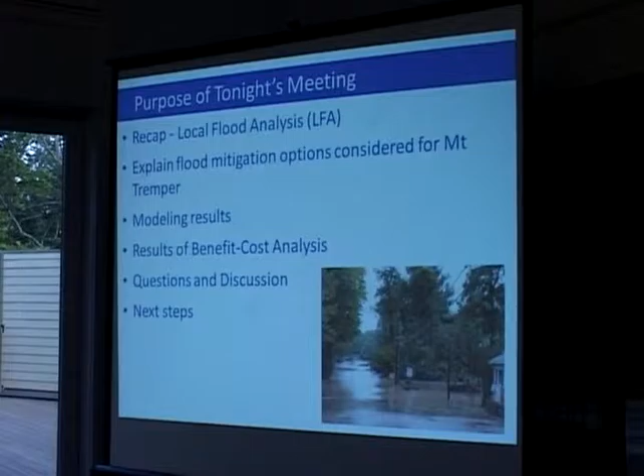So I'm going to go back over just a little bit what's involved in an LFA, or a local flood analysis. What's that all about? We explained it in detail in the fall, but I'll do a recap. Then I'll explain some of the flood mitigation alternatives that we proposed, vetted, and modeled here in Mount Tremper to look at different flood reduction scenarios. I'll show you some of our modeling results and talk about the benefit cost analysis.

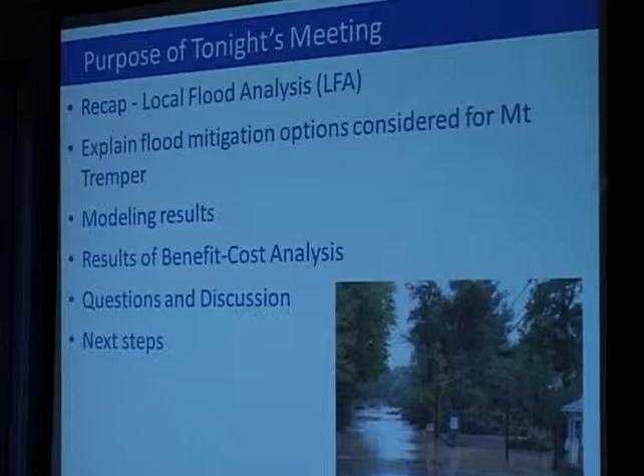And the benefit cost analysis, as Eric said, is really to find out - we can recommend lots of things that may not be cost effective. They may cost more to implement than they would save in flood reduction. So that's the purpose of the benefit cost analysis, and I'll go through some of the results. It's really to find out what's feasible. Then we can have questions and answers and discussion, and talk about what the next steps are.

So just to go back over the meetings, we started off, it was actually September, a year ago. We met with the town board, made a presentation, and talked about an introduction to this process. Then we met in the two communities where these studies are taking place, local flood analysis in Phoenicia, which we presented...

...last Monday, and then we met here. We went away, did our analysis, and met at least half a dozen times with the Safari group, which I'll talk about in a bit. And now here we are. We met last Monday night in Phoenicia and presented our results there. Had a lot of good discussion, and now here we are tonight. Our next step will be to present the final project results to the town board.

So what is a local flood analysis? It's an engineering analysis, scientifically based. We use state-of-the-art hydraulic modeling, developed by the Army Corps of Engineers, to look at different flood mitigation scenarios to find out whether they work or not - do they reduce the amount of flooding, and by how much?

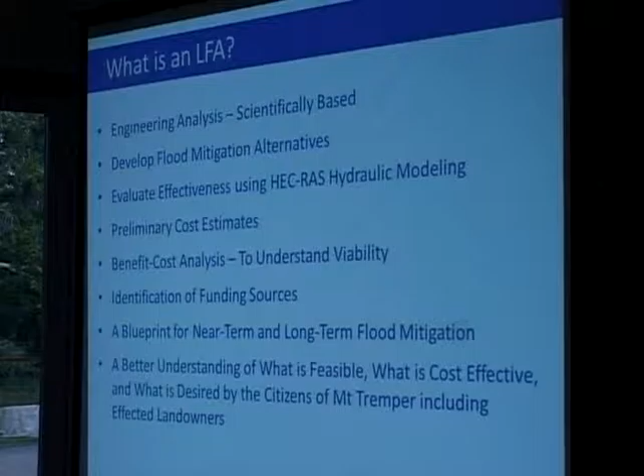Ultimately, what we want to leave you with is a report and a presentation that gives everyone a better understanding of what's feasible in terms of flood mitigation, what's cost effective, and what's desired by the people who live here, including the affected landowners from past floods.

Myself and my colleagues at Milone and MacBroom, probably a dozen of us who worked on this project, worked closely with the Safari Group. Safari is the Shandaken Area Flood Assessment and Remediation Initiative. They worked on other projects prior to the LFA, and we worked closely with them on the LFA. It consists of the town, several Shandaken residents and business owners, and I know some of them were at the meeting last week, and I see some faces here from Safari tonight.

The Ashokan Watershed Stream Management Program, which consists of Ulster County Soil and Water, the DEP, and Cornell, and then Ulster County Department of Environment, and our firm as well.

So the project area in Mount Tremper, it's project area number 2 here because, as I said, we're also doing a similar effort in Phoenicia. It really extends along this reach of Esopus Creek, where we're sitting right over here, and also a reach of the Beaver Kill from where that line is downstream.

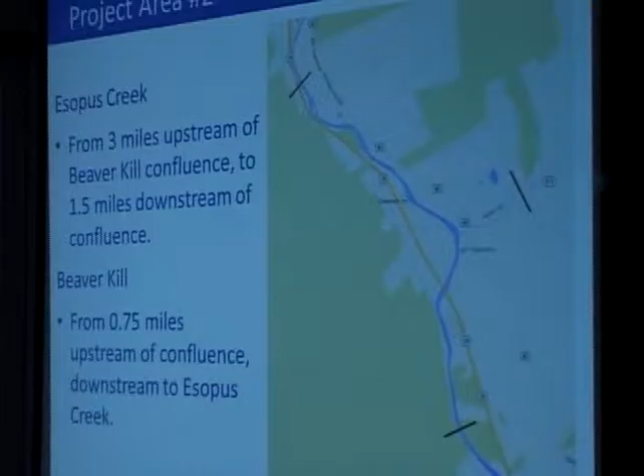And this is the project boundary as it was drawn at the beginning of the project.

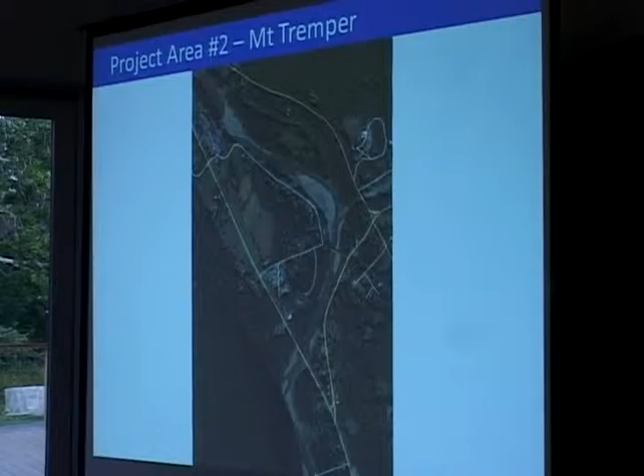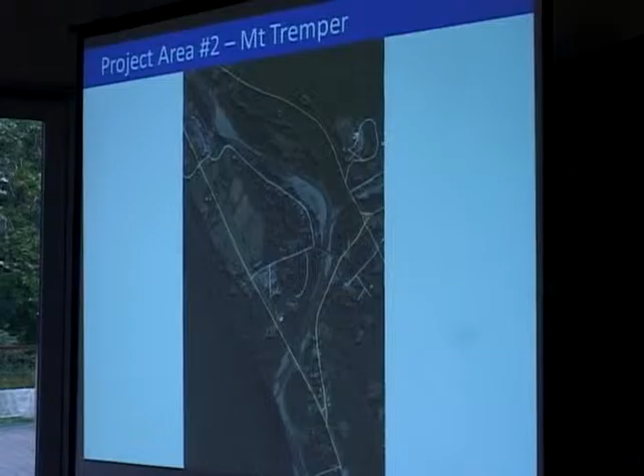Now just to set a little context here, here's the area where we are now. I want to show you some overlays that are preliminary flood insurance rate maps now in front of the town from FEMA. This light green area is the special flood hazard area, often called the 100-year floodplain. It's the area that's inundated by the 100-year flood.

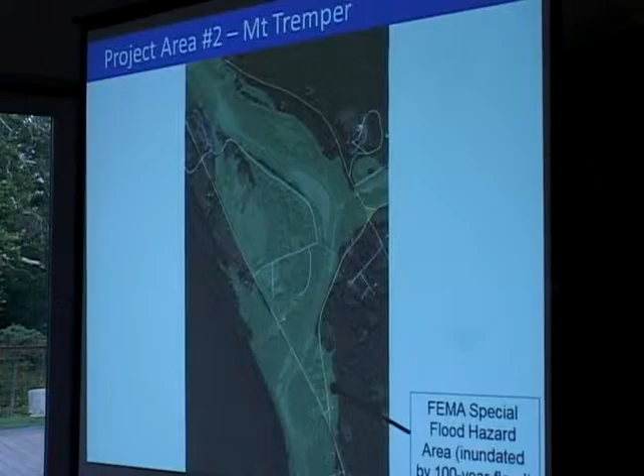If you have a mortgage and you live within this area, you're required to buy flood insurance. If you're developing a home in this area, you're required to be 2 feet above the base flood elevation. These are regulatory layers put together by FEMA.

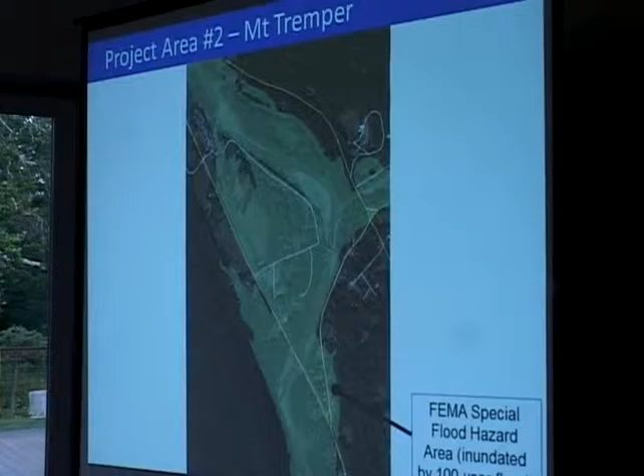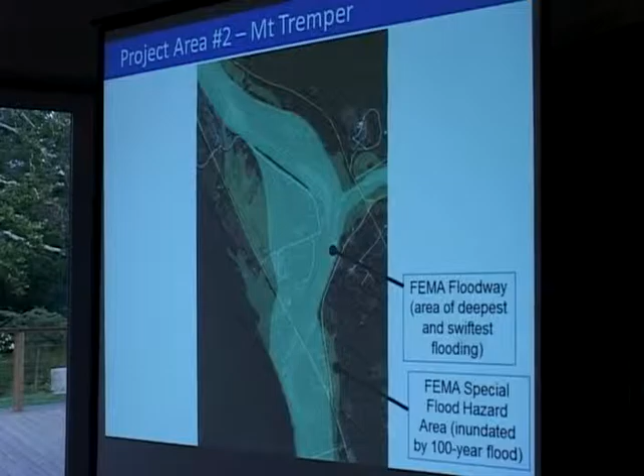A subset of that is the floodway. This is an area identified that represents the area closest to the channel, where the deepest and swiftest flooding occurs. It's a dangerous place to be. And we have development in the floodway in Mount Tremper, so there are some challenges in trying to reduce the flooding in a place like this.

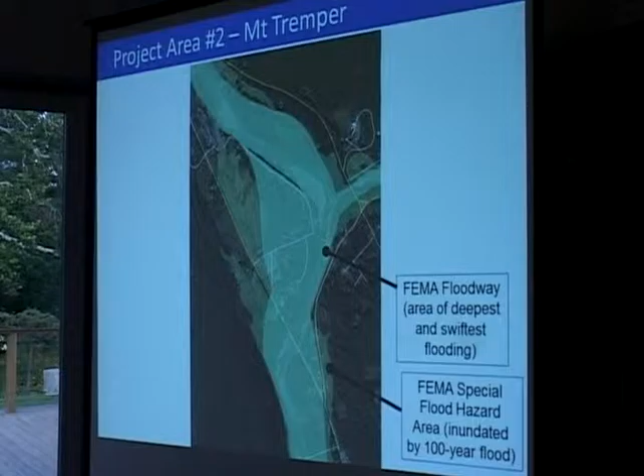As I said, these are the preliminary FEMA maps, and I was just speaking with Aaron a minute ago. Aaron was very closely involved in this process, and compared to the previous FEMA mapping there have been some changes around the edges of the 100-year floodplain. I don't know if you want to say a word or two about that, Aaron.

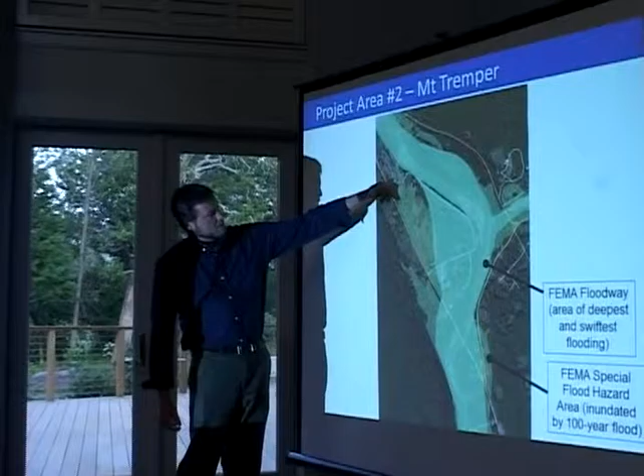In some areas you'll have a floodway that's rather narrow compared to the size of the special flood hazard area. In this case, our floodway is very wide, in part because of the way the channel bends here, and you have high velocities coming across here.

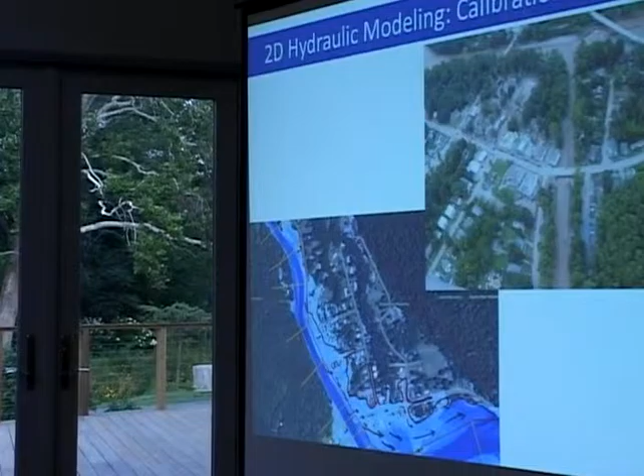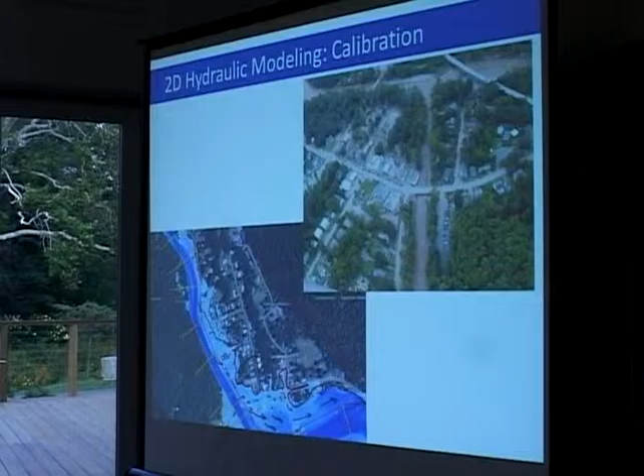Now I wanted to give a little demonstration here. I didn't talk about this hydraulic modeling, but unless you're someone who uses it, it's a little bit hard to visualize, so I just want to run a little movie in Phoenicia that sort of takes you through the storm. This is Irene - we ran the Irene hydrograph.

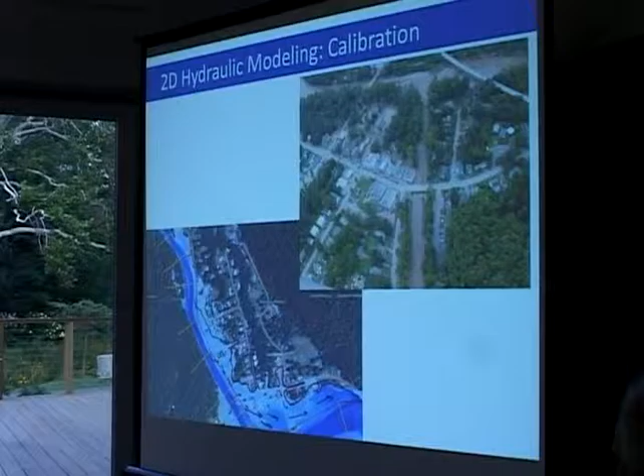We use this similar type of information here in Mount Tremper, but what I have here is a little video of the Phoenicia Main Street area where Stony Clove comes in. If you just give me a minute, I will run that little video, just so you can see how this hydraulic modeling works.

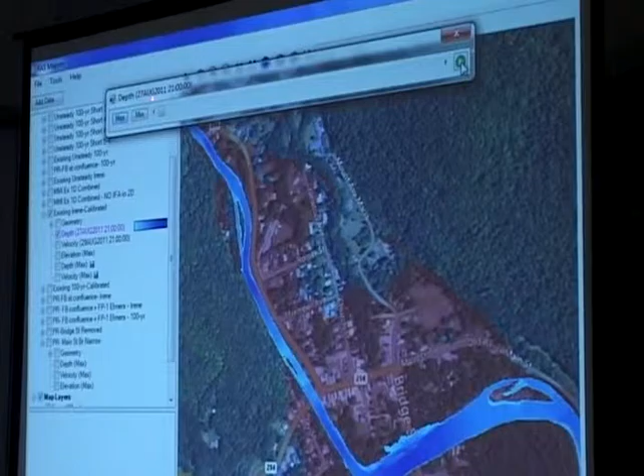Now, on this map, this is Stony Clove Creek coming down, and this is Esopus Creek, and this is Phoenicia and Main Street, I'm sure you're all familiar with it. The depth, the blue colors, represent the depth of the water during the flood. This is prior to Irene, the water's in the channel. Up here, this space bar is going to go across as the movie plays, and this is the time of day. It's August 27th at 9 p.m.

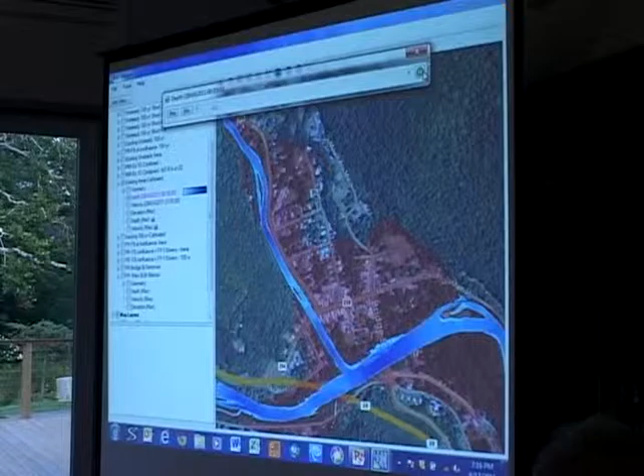I'll just run that across. This is our existing conditions, so you'll see this run. It takes a little while to get started. You can see the depth come up, you see it flood down Main Street, and then it subsides.

We use some photos taken from helicopters to calibrate our model. It covers the 27th just for about an hour or two, and then the full day on the 28th, and it runs, I think, to late afternoon or evening on the 29th. But the real peak there is mostly just on the 28th.

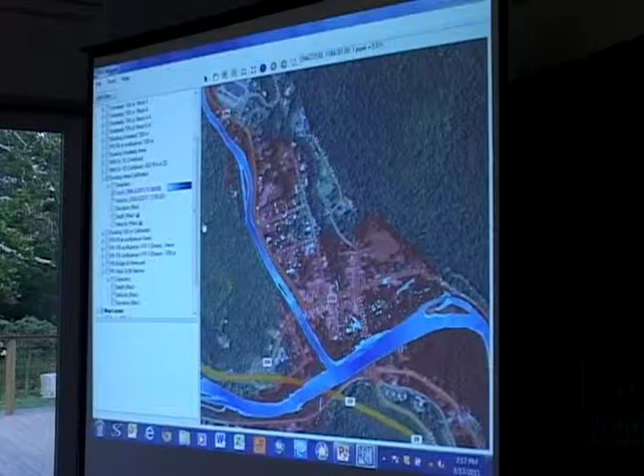There's just one more I want to show you. This is really just to show you what I mean when I talk about this hydraulic model. This one is a similar model, but it deals with velocity, the speed at which the water is flowing. In this case, red is quickly flowing water, and blue is water moving more slowly. This is a similar time frame, the same time frame.

But what you see here, if you watch, for example, Main Street, you'll see some of the velocities, like the yellows, that start to go down Main Street. We talked to a few folks about this, and we get the sense that it's pretty accurate, very accurate, and it's kind of state-of-the-art modeling.

Now, once we understand the existing conditions, and this was the Irene flow, but we could also look at the 10-year flood or the 100-year flood. When we try out different flood mitigation scenarios, we can plug them into our model and compare it to the existing conditions. Then we can say, well, how much of a reduction in flooding resulted from what we did?

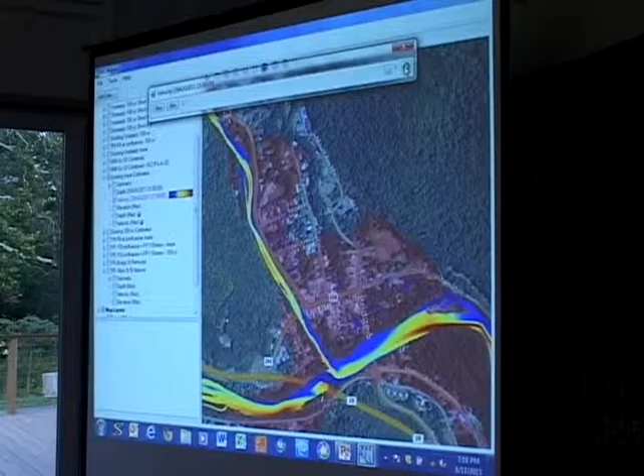So we can switch back to my presentation here.

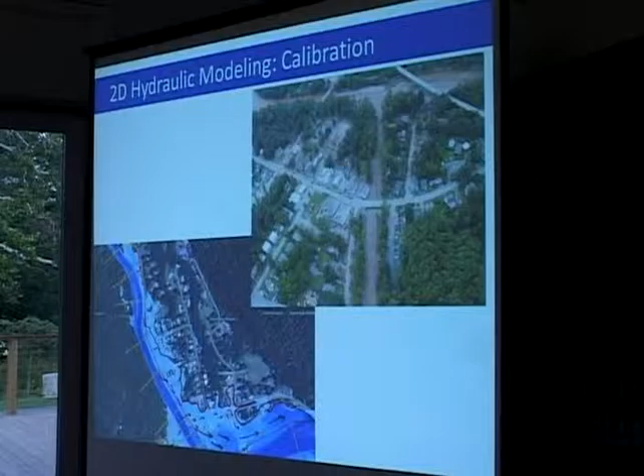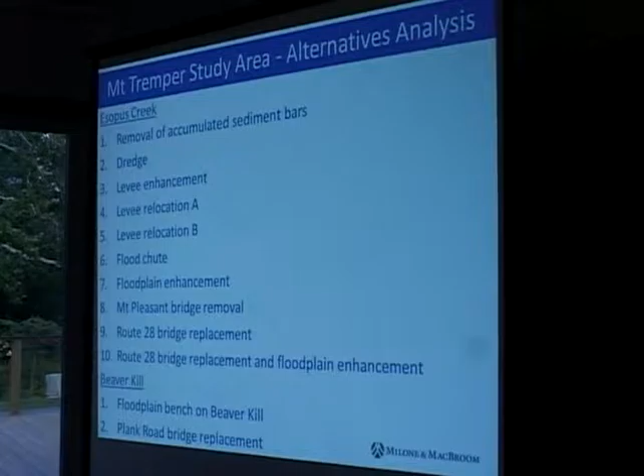These are the alternatives that we evaluated for using the hydraulic modeling in this study area. We had 10 different things that we evaluated on the Esopus Creek, and a couple on the Beaver Kill where it comes in. I'm going to go through all these one at a time, some of them fairly quickly because we pretty quickly learned they weren't going to work. Others had some merit, and we examined them further. And others we advanced all the way to the point where we did a cost effectiveness through the benefit cost analysis. So I'm going to move through these.

I don't want to go into a huge amount of detail on ones that aren't going to have merit, because I think your eyes would all gloss over. But one thing we tried was trying to take out accumulated sediment bars. My colleague Vern and Bevan and I canoed from up at the Woodland Valley Bridge down to well downstream of 28. We noted, also through aerial photographs, where a lot of these big cobble bars are.

So in the modeling, we're able to remove those cobble bars and see what sort of benefit it had. Cobble bars, like you see here, are just bars in the river areas where cobble has accumulated, sediment has accumulated. In this creek, that's what it's called.

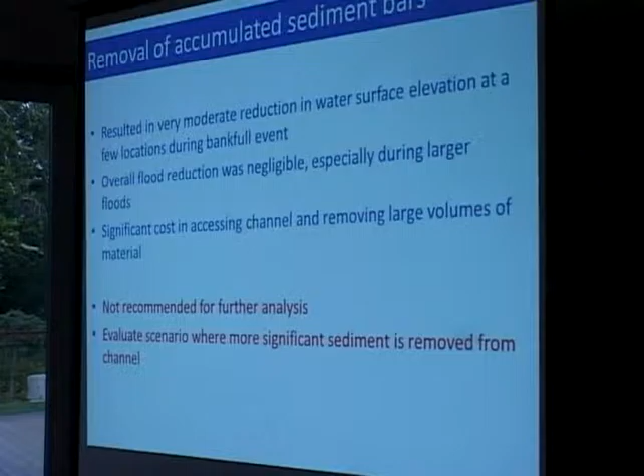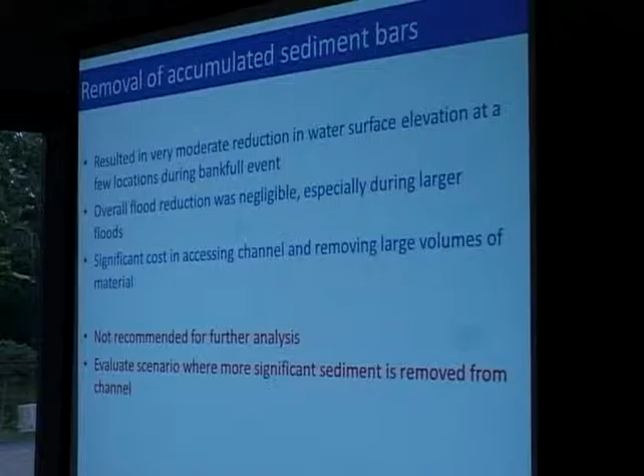We found that by removing those cobble bars, it resulted in only a very moderate reduction in water surface elevations at a few locations in the channel. The overall flood reduction benefit was negligible, especially during larger floods. And there's a significant cost to accessing the channel and removing that material.

So we didn't evaluate it further, but we did evaluate a scenario with much more significant sediment removal. We're actually dredging down and taking out much more material. That's the next step here. So this is our dredge scenario.

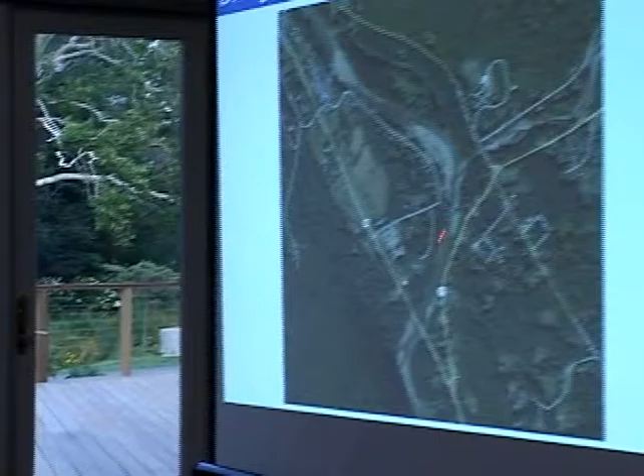So we modeled, this is where we are right now, going down around the bend, under the Mount Pleasant Bridge, through the Route 28 bridge, and here's where the Beaver Kill comes in. Now that is the area where we dredge down, represented by that red arrow.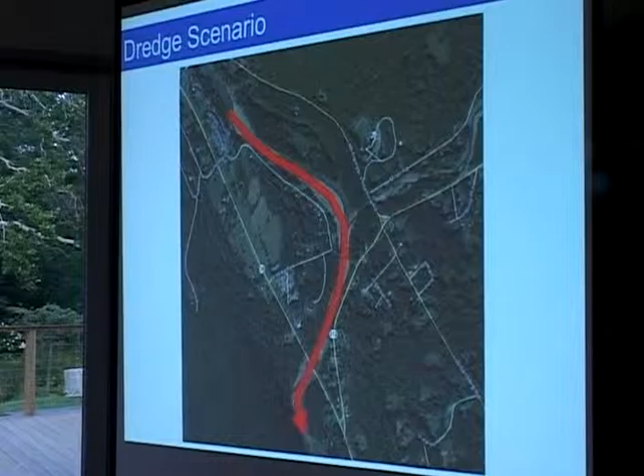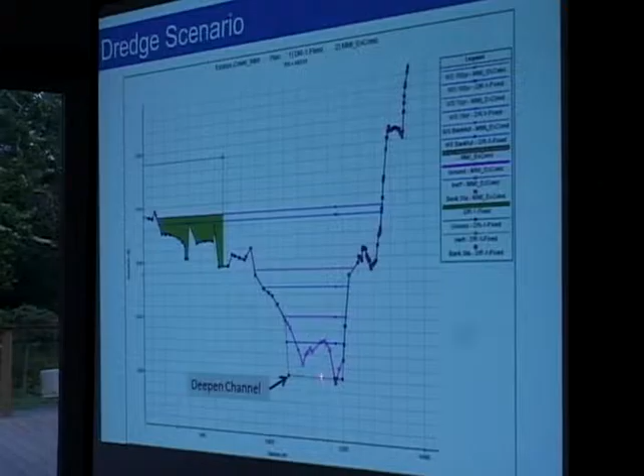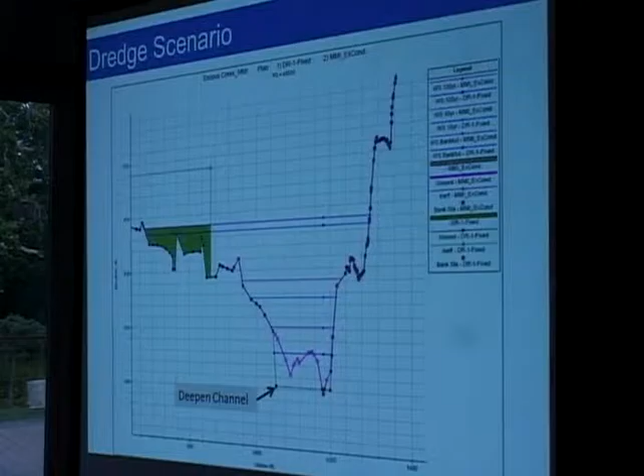In the model, we dredge the channel down 3 feet. What it looks like is something like this. This is looking at the channel in cross-section, and where we go in and change the shape of the channel in the model, we're basically removing all this material. The pink line is the existing channel, and the black line is the proposed channel in the model. We can run that and see what sort of benefit that has on flooding.

So we dredge down Esopus Creek by a depth of 3 feet from adjacent to Emerson, downstream approximately 1 mile to below the Route 28 bridge.

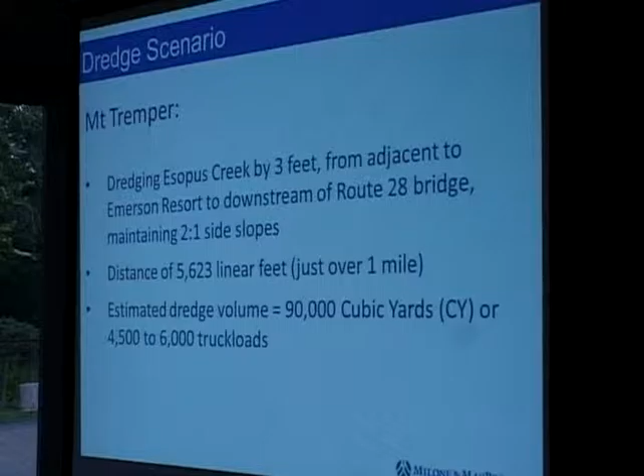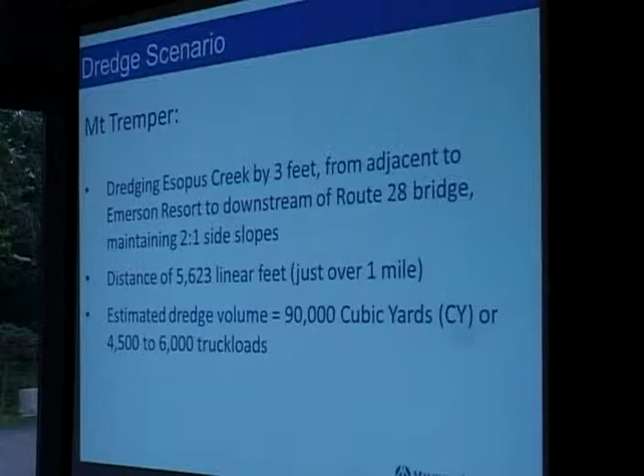Our estimate of the volume of sediment taken out to enact that scenario is 90,000 cubic yards. And that's, it's hard to, I mean, you can imagine 1 cubic yard maybe, but it's hard to imagine 90,000.

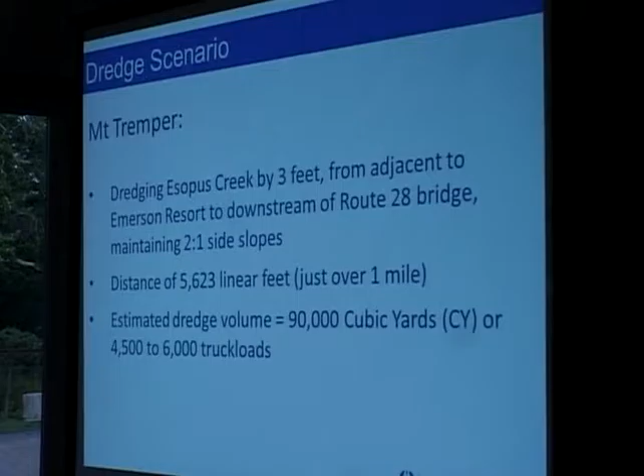So we used a range of 15 to 20 cubic yards that fit in a big triaxle dump truck. That's the range we see for the number of truckloads, 4,500 to 6,000. So it's a lot of material to run this dredge scenario that would have to be carted out of the river. In order for it to be effective, it has to be taken out not just of the active channel, but out of the floodplain and taken away somewhere else.

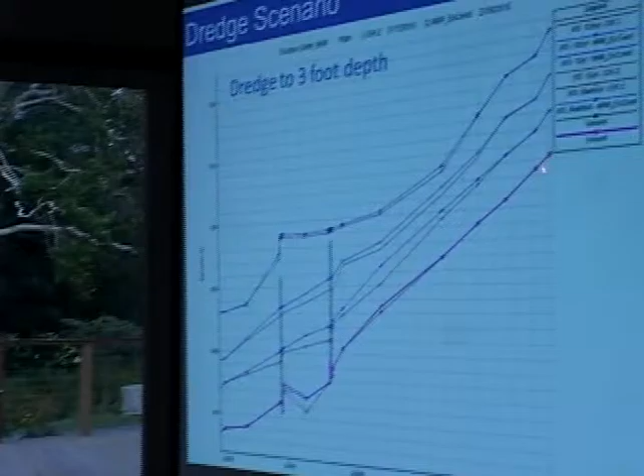So I have to explain what these lines mean, but this is the profile of the channel, the bed of the channel coming down over the length that I described that was being dredged. This is the Route 28 bridge, and this is the Mount Pleasant Bridge. These water surface elevations, the blue represents existing conditions for the bankful event, the 10-year flood, and the 100-year flood. The red represents proposed conditions.

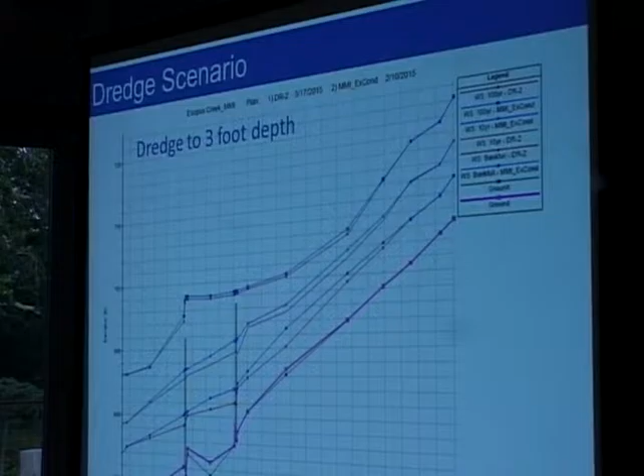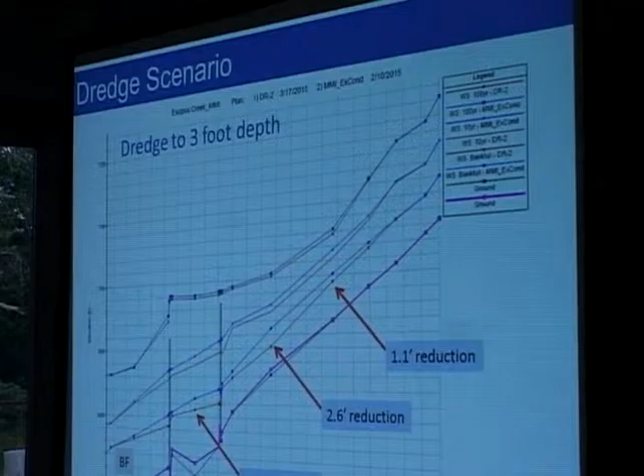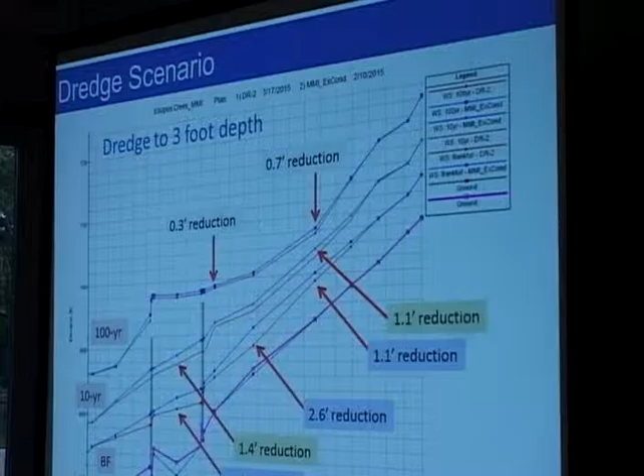So you can see on the proposed conditions that the dredging has reduced the water surface. This is bankful, and you see some reductions there, ranging from a foot to 2.5 feet. When we get to the bigger flood, a 10-year flood, we see reductions of 1.5 feet, 1.1 feet. We get up to a big flood, a 100-year flood, and we see less than a foot of reduction.

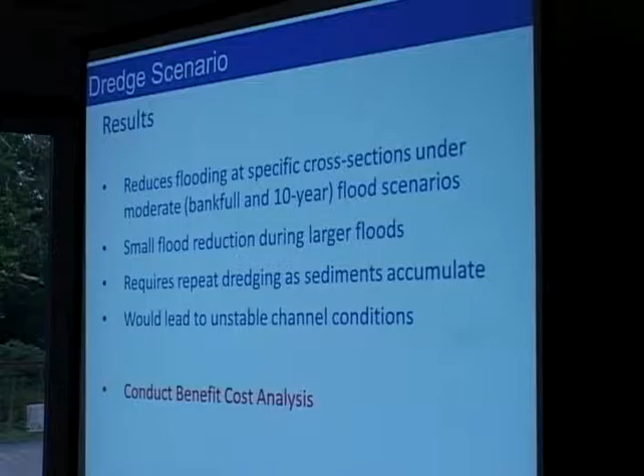So what we see here is, under that dredge scenario, flooding is reduced at specific cross-sections under moderate, bankfull and 10-year flood scenarios. You see a small flood reduction during the larger floods, the Irene magnitude or the 100-year flood event. There is some reduction, but it's small.

We also know, because of the way rivers behave, that it requires repeat dredging. Doing that once isn't going to work. We estimate that over a 50-year period, you would have to do it 5 times. And it would lead to unstable channel conditions.

We're going to advance this dredge scenario to the benefit cost analysis, and I'll show you the flood reduction benefit versus the cost of implementing them, and I'll come back to that. I'm going to go through several more alternatives, and then we'll go through all the benefit cost analysis.

What kind of unstable conditions? Yeah, what does that mean? Okay. And Mark, also did you identify bankful? Yeah, okay, bankful, that's a good point.

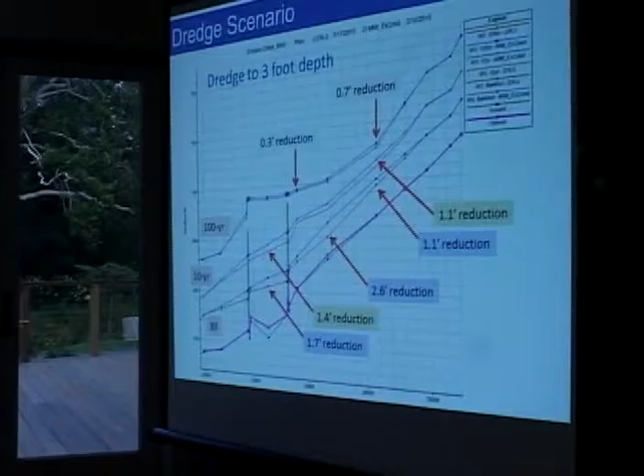A bankful event, I mentioned that lowest pair of lines is the bankful event. A bankful event means the channel flow is right where it connects to its floodplain. It typically happens every 1.5, 2, maybe 2.5 years, somewhere in that range of frequency. So it's something that happens quite frequently. It probably does not result in any houses getting flooded. It's sort of an annual flood, or slightly less frequent than an annual flood. And we use it as part of our analysis. We consider a whole range of flood events.

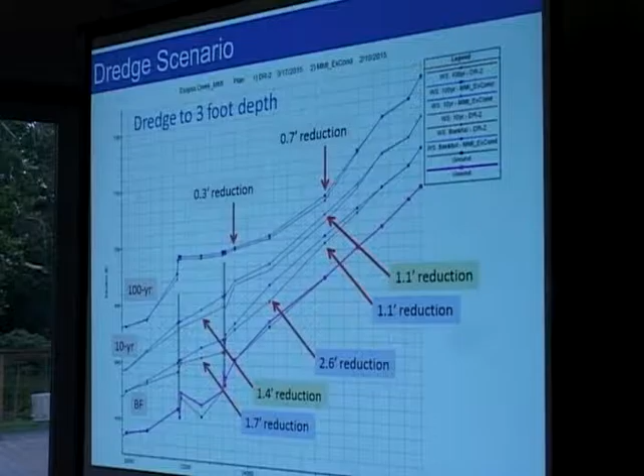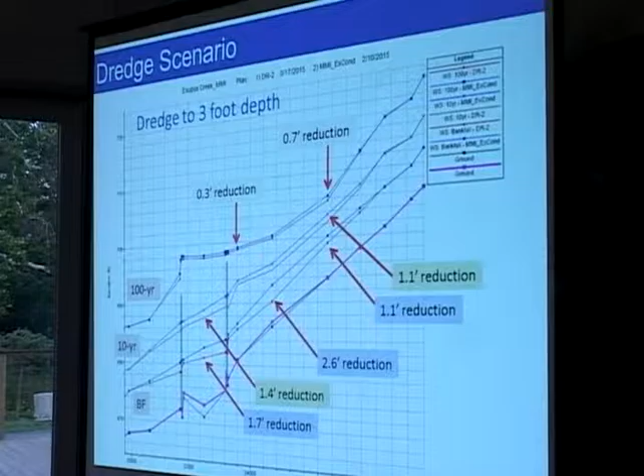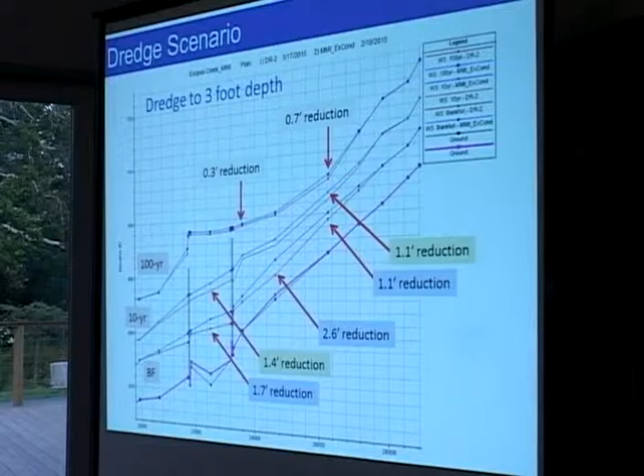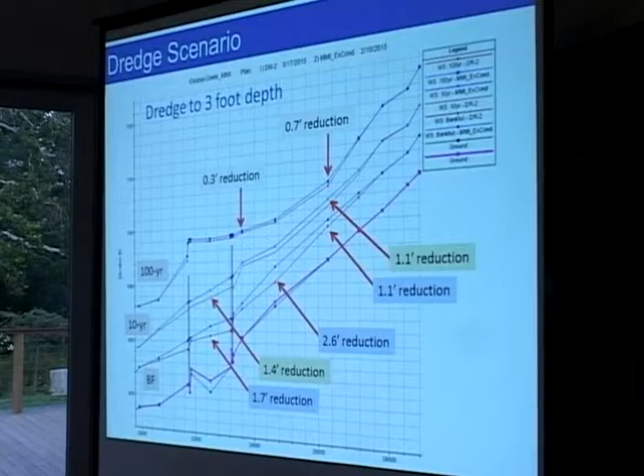When you deepen the channel, and getting back to the stability thing, when you dig down the channel without enhancing the floodplain, you just deepen the channel, it causes instability for several reasons. You're steepening the banks, and steepening the transition from the area that wasn't dredged to the area that was dredged, which could, if water pours into that area, create head cuts that travel upstream and cause the bed to come unraveled. It also, because you're increasing the depth without increasing the width, you're causing shear stress, which causes the channel to get deeper on its own.

In other cases, you're creating a sort of bathtub effect by digging it out, which will then refill with sediment. So there's a number of reasons, and we know this from experience and having seen it in other places, that dredging can lead to those sort of unstable channel conditions.

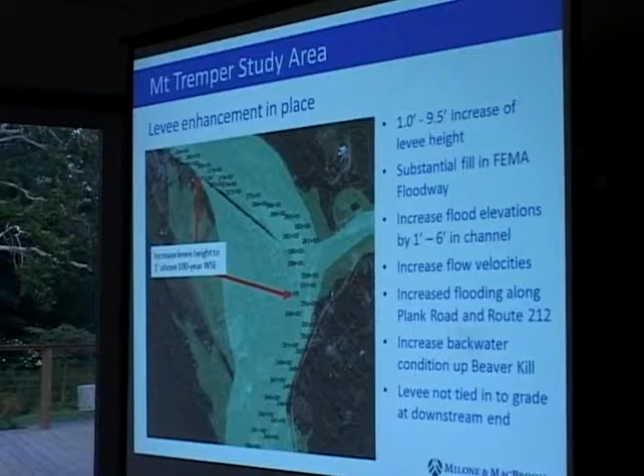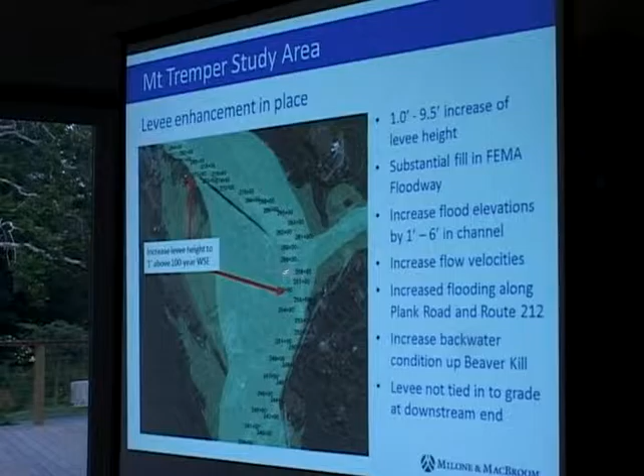Now we looked at several levee-related alternatives, and this was one. There's an existing levee out there now, but it's not high enough to contain a big flood. During Irene, it overtopped over here, and water also came in this way. You can see in the model, parts of it are high enough, but other parts aren't. It's not effective in completely stopping flooding in this area.

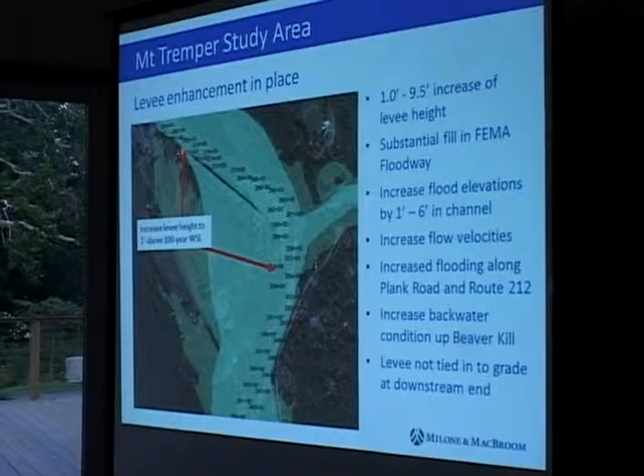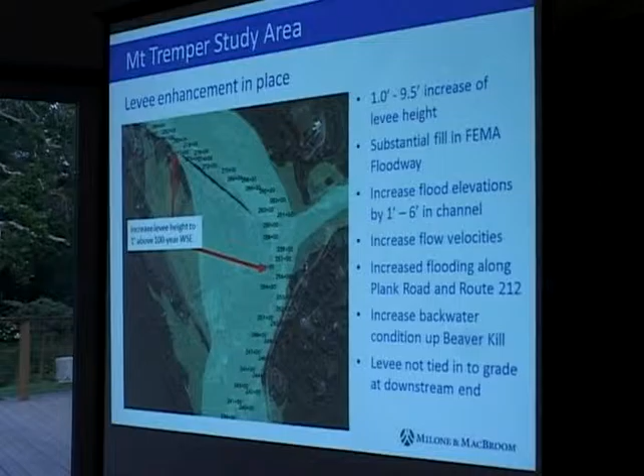So one thing we modeled was elevating the height of the levee, putting in a higher levee this whole distance. But what that does, by trapping this water and forcing it all into the channel, is increase velocities. It also increases flooding on this side by forcing water surface elevations up. That is why typically you're not allowed to place fill in the floodway, because when you do that, you flood someone else downstream.

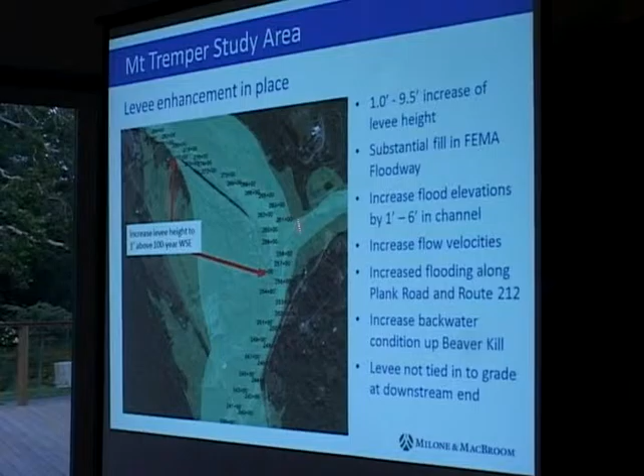If we cut this area off, we're increasing flooding on this side along here. It might be helpful to give an indication of how much higher the levee is. So in some locations, the levee's pretty close to the level of the 100-year flood.

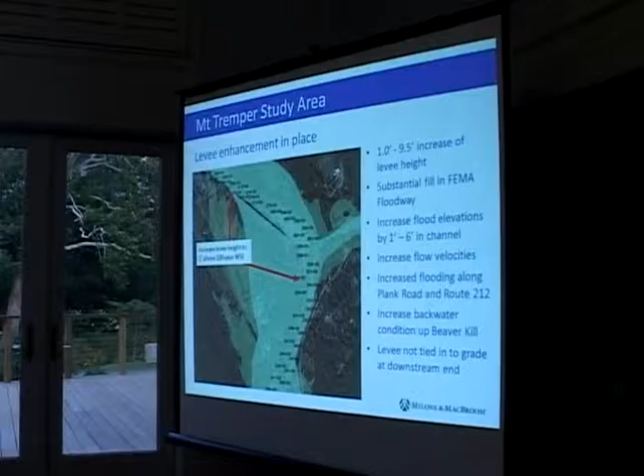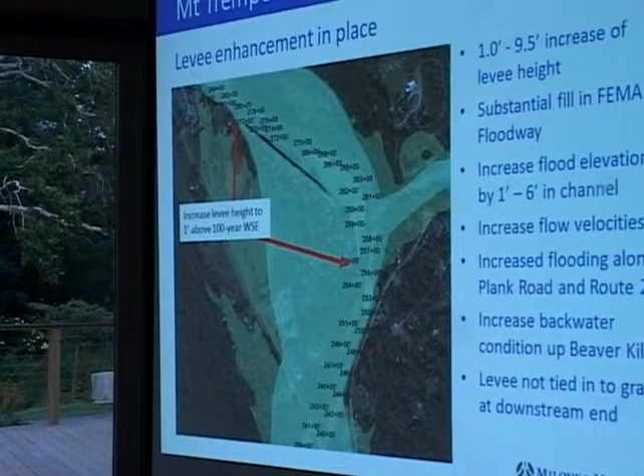In order to contain the flood, as you move further downstream, the levee sort of tapers off and isn't as high. When we modeled it, in order to get a foot above the 100-year flood elevation, in some places that levee was being increased by 9 feet in height. And even with that scenario, unless this downstream end of the levee is tied in somewhere, flooding still gets in at some locations along the channel down here.

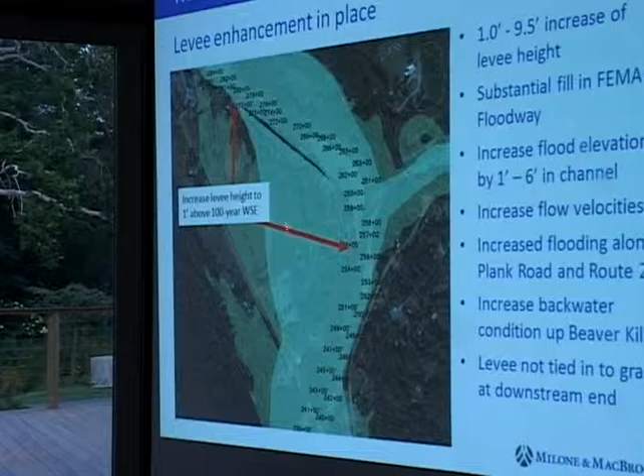How much of an obstruction is the old bridge when it comes to the flow of the river and the flood? Did we evaluate that, how it slows it up and backs it up? This bridge, the old bridge, not very much. But the new bridge, the lower Route 28 bridge? I'll get to that, we did a whole evaluation of it. We evaluated the removal of 3 different bridges, and I'll get to them.

But I'll just hit on this bridge for now, the Mount Pleasant Bridge, the one that's closed. Because the water goes around it, the structure itself does cause an increase in water elevations. If you take the bridge out, it reduces it, but not a huge amount. Taking it out caused some reduction in flooding, but not a large reduction.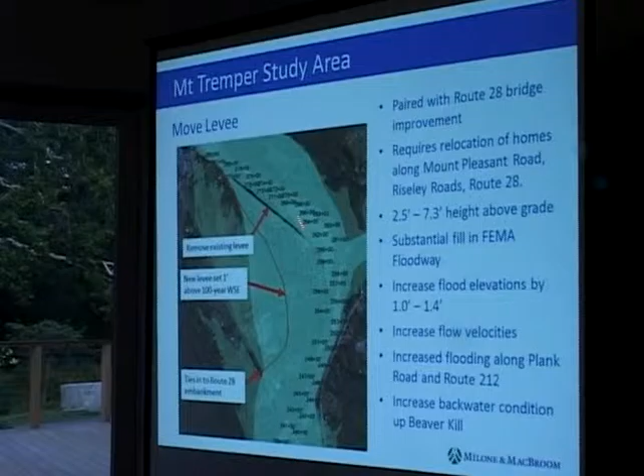So we looked at another levee scenario where we basically got rid of this levee and pulled it back. This creates more dry area. However, there's a lot of homes that would have to be relocated on this side. And even if we did that, we're still creating a levee in the floodway that's going to increase water surface elevations and increase flooding on this side, as well as increase velocities.

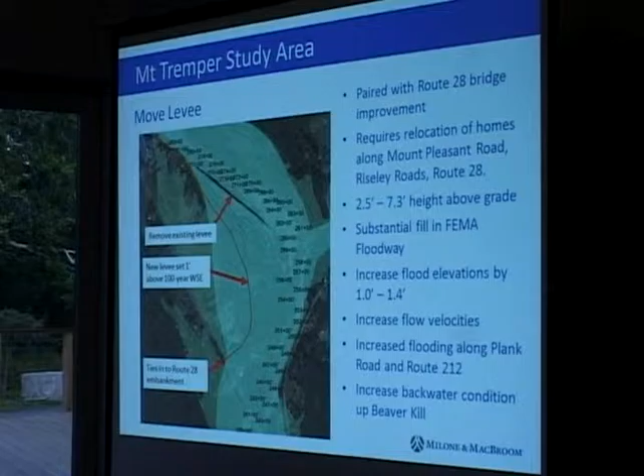What changed that it's no longer done? The fly fishing probably changed a lot of that, because contractors used to go in there and get rubble all the time. They used to get permits to go in and clean out the cobblestone bars. There was a change in the ruling of the DEP. Was it the DEP, not the fly fishing groups? Okay.

It wasn't a good idea. It didn't work. The levee had been raised, just made before Irene, the last big flood - that levee had been raised about a foot.

My house is right on it? Yep. So I'm curious as to why they just stopped maintaining it and let it go. I don't know the full story of the levee. I know it's not a FEMA certified levee, which would mean... but it does actively stop the 100-year flood in the area.

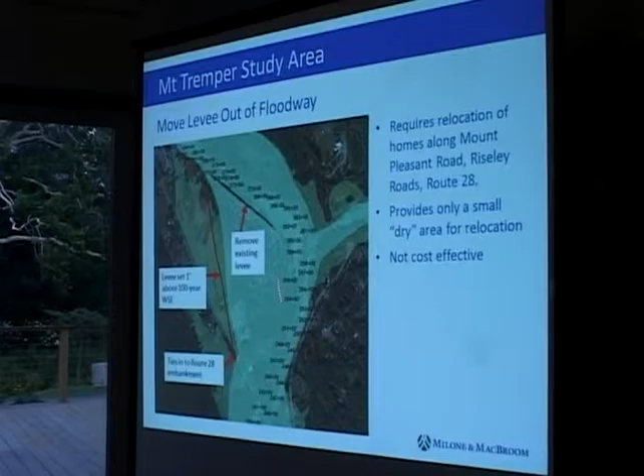However, now we've basically taken all of this - it would all have to be relocated, and we've only created a very small dry area on this side. So really, by the time we moved it out of the floodway, it really would not be cost effective.

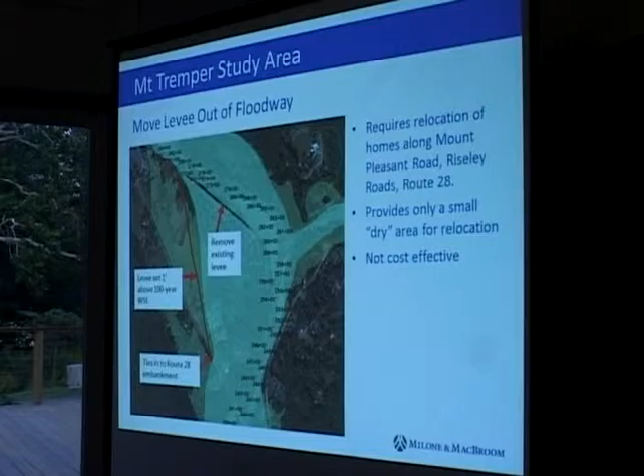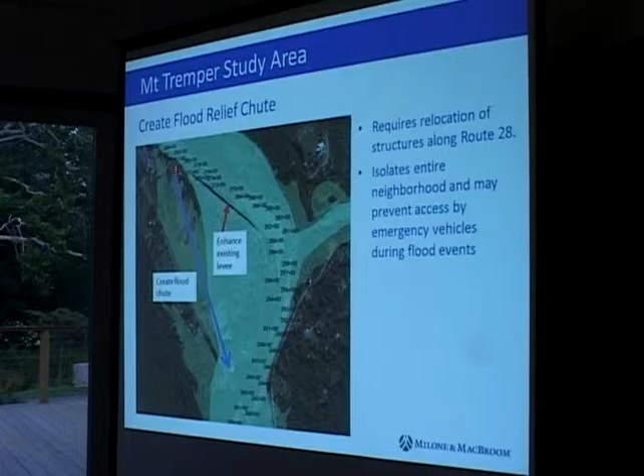So we looked at several levee scenarios, and then we looked at one other scenario, which is basically a flood chute that carries the water on this side of the neighborhood during a flood. What we found in the modeling is it works quite well in a moderate flood, but in a big flood it quickly gets overwhelmed, and this whole area floods.

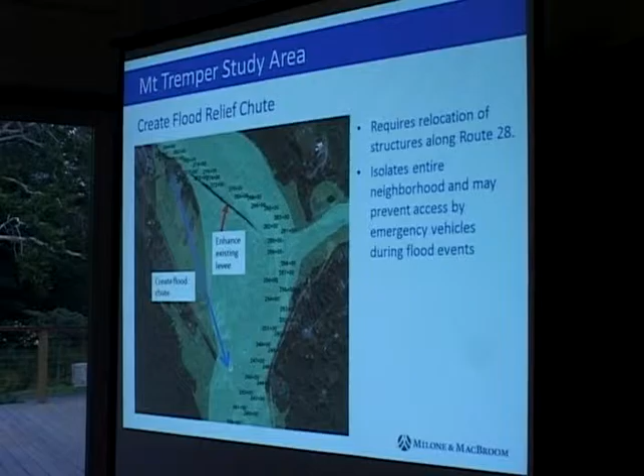And then what we're left with is a situation where, if you end up trapped out here, you end up on an island. We couldn't recommend this sort of design in good conscience, and we've seen it.

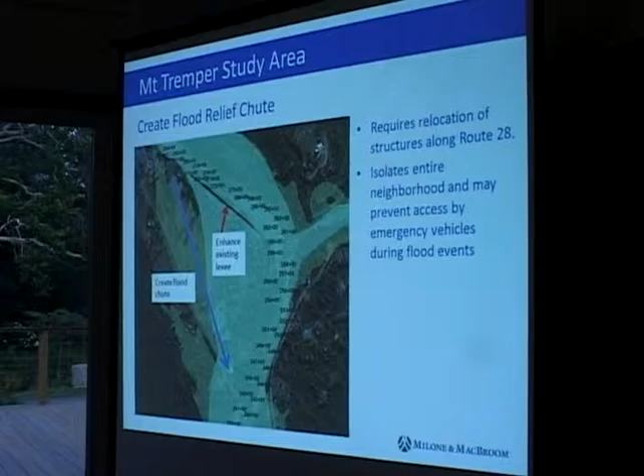We were just talking about another project we saw in another place - it was actually a facility, like an elderly assisted living facility. They actually designed exactly this scenario, except it was overwhelmed, not during Irene, but during the June 2013 flood, and it left this whole fairly large development of elderly, in-need-of-assistance folks on an island.

On an island, yeah, and that's very dangerous. Well, not particularly - they had no water, no food, and it was an assisted living facility, so it was cut off, with no evacuation route at all.

So in terms of the levee and flood chute scenarios, I've already summarized all this, I won't read it all to you, but we don't feel there's an effective solution here using levees or a flood chute.

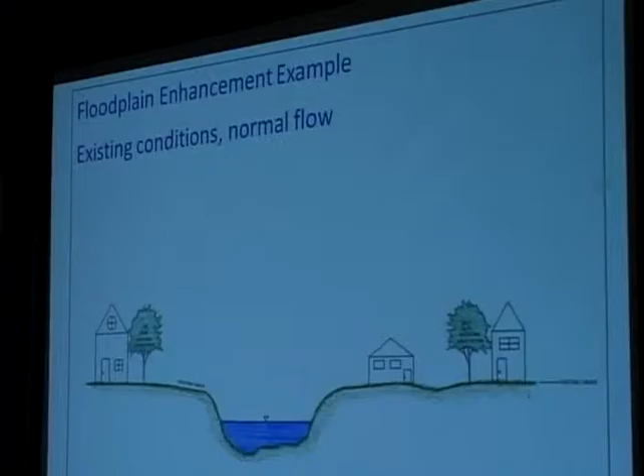Now, the next thing I'm going to describe is a floodplain enhancement scenario, and this could be a little challenging to explain. I tried it last week, and I decided to redo the slides a bit to illustrate it better. So, this is under normal flows, and we've got three houses here, and here's the channel.

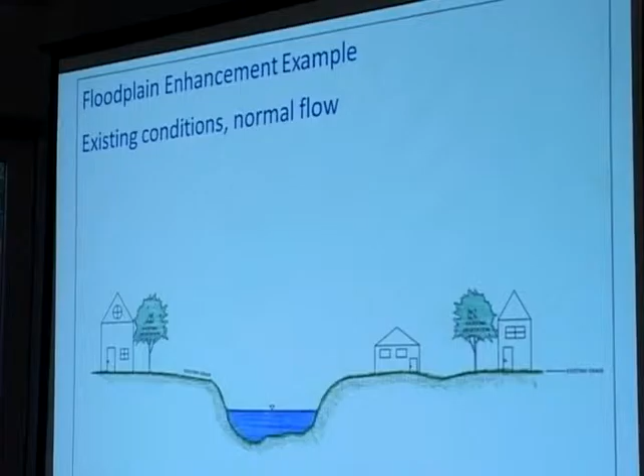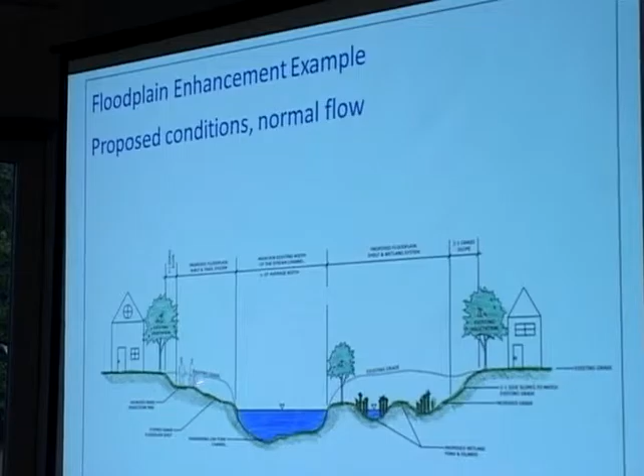You notice that this house is gone - we had to relocate that landowner. And over here is a bikeway and a trail, a recreational use. So this is just an artist's rendition of one idea.

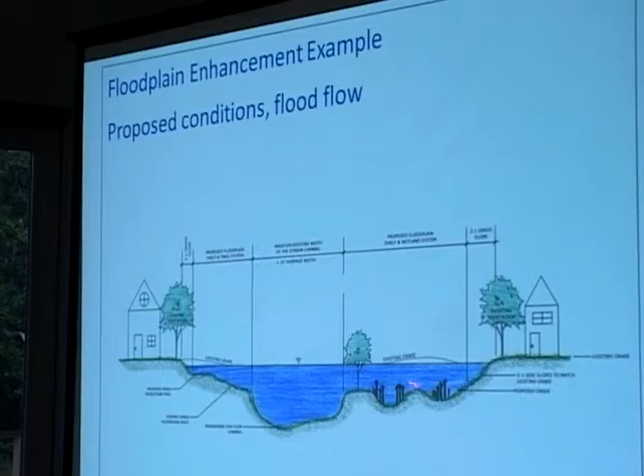But now, that's our same flood - so we relocated this home. We have two homes that are no longer getting flooded because...